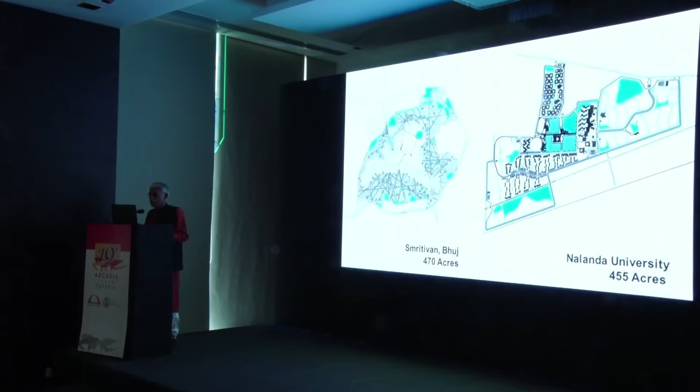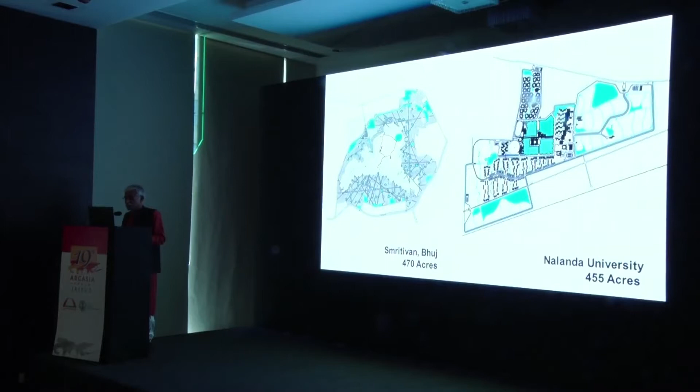I'm going to show you very briefly 2 projects that are intrinsically connected to these attitudes. One is a memorial for the earthquake victims in Bhuj in 2001, which is called Smritivan. And the other one is the Nalanda University, which is in Rajgir, Bihar. And both these projects are about equal size. One started in 2004 and is still continuing 14 years later on, and the other one started 4 years ago and also continues. So all these are things in progress.

The Smritivan earthquake project started from a very simple brief: plant a tree for each victim. There were 13,805 people who perished in the earthquake, and for each of them, we had to plant a tree. The challenge was not planting a tree. Planting a tree in most cultures is a very simple thing. In most climates, extremely simple.

In the place that I'm talking about, which is almost desert, where you get only 300 mm of rainfall, and that too once in 2 years, perhaps if you're lucky, planting a tree to sustain it is a difficult proposition. Most trees, even if you plant them, don't sustain. So the challenge was not only about planting a tree, but the sustenance of the tree, and then to make a forest, to have diversity, to represent the vastness and diversity of this country.

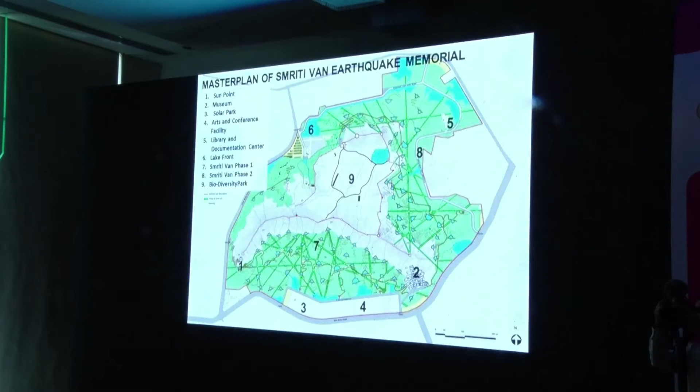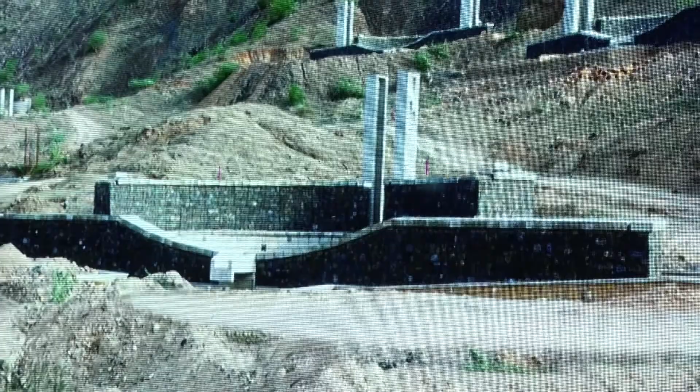The system is quite simple. There are these reservoirs made of gabions. Gabions, as you know, are rock-filled baskets. And so it is just to arrest the water that flows from the hillside before it dissipates and evaporates, to charge it into the earth. And so the waters fill up, and over time they recharge the ground. And the root systems of the trees pick up that water and grow from that. And over time, as you will imagine, soils will come in, change this.

The names of the victims incidentally happen along the walls of these reservoirs. And the reservoirs are designed so that they disconnect you from the terrestrial realm when you're entering them. And as you step in, much like a step tank, your connection is only to the cosmic forces, to the sky and to the water below, and to your inner self, to reflect in this environment.

You can see all the reservoirs that have been completed, the paths that have been connected, the planting goes on. This monsoon, most of the planting would be complete. And in another 2 years, you would start seeing the landscape emerging out of this.

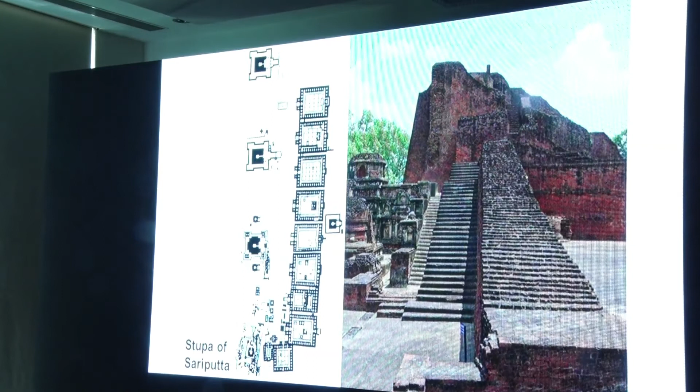The other project that I'm going to be talking about is the Nalanda University. And this is in Rajgir, Bihar. It's about 12 kilometers from the ancient ruins of the old Nalanda University. The Nalanda University, as some of you may be aware of, as Mr. Reval mentioned, is one of the oldest universities in the world.

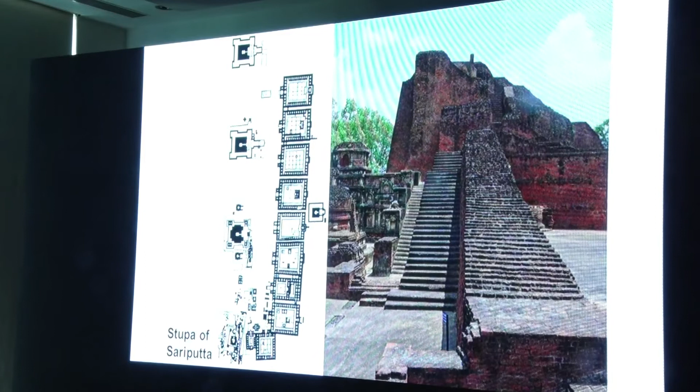It was founded in the 4th century AD and was destroyed by the 12th century AD. In that time, it had scholars from all of Southeast Asia. It built up a network of world linkages for its scholarship. And there are the parts that have been excavated. The most evocative of these are the ruins of these stupas built in brick out there, and the viharas that abut that.

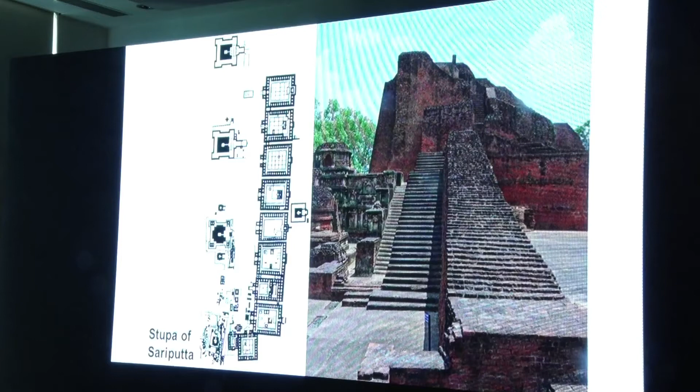Our idea was to connect the waters, because this is one of the largest net zero universities being attempted in the world. It's not a building, it's many, many buildings over many, many years that are being planned, and all are net zero, which means our water needs, our electrical power needs, our waste, all of that has to be recycled or generated within our site.

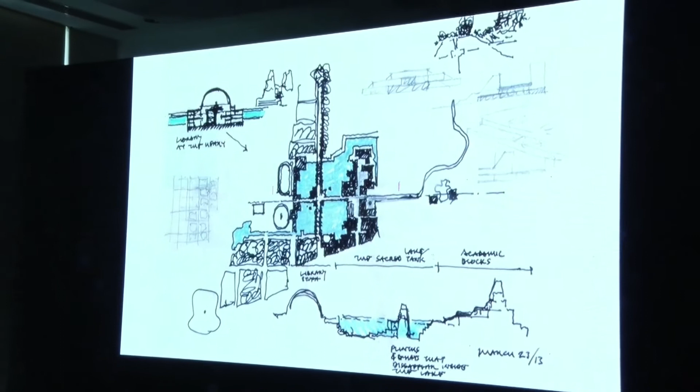So this is the initial sketch before we won this competition. It was an international competition where, out of 80 participants, finally 8 were shortlisted to participate, out of which 5 were international. And the idea of the drawing is to show a city much like our traditional cities, around a tank of water, a sacred tank around which the city grows.

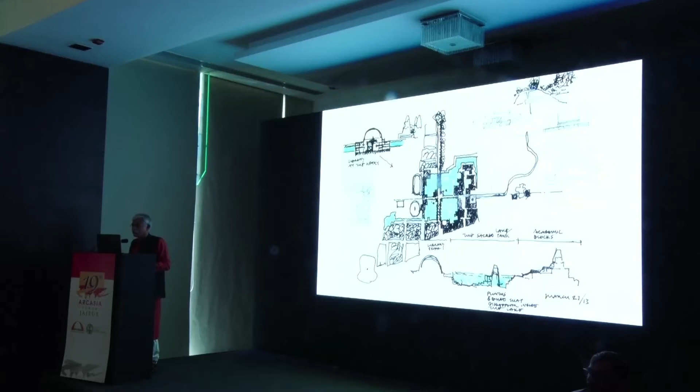Water, as most people think, is a simple thing. It's actually a fairly complex thing. The ways that you collect water become very, very important. It's not only the runoff generated, but how much soil is percolated, how much evaporation takes place. And even in the runoff generated from the rooftops, you get cleaner water. From the paved areas, you get less clean water. And the landscape runoffs, there is very little that you can collect. So all of these we took into account to balance out our water needs.

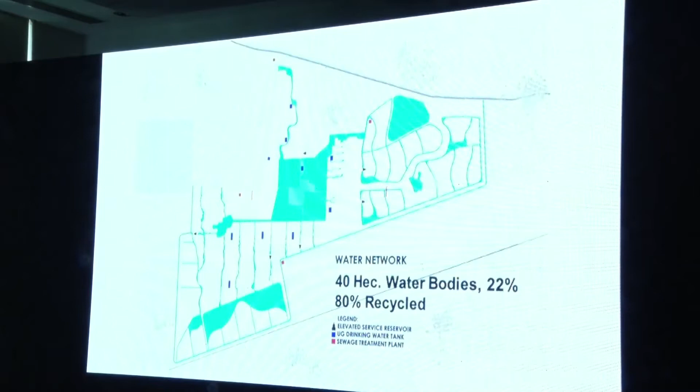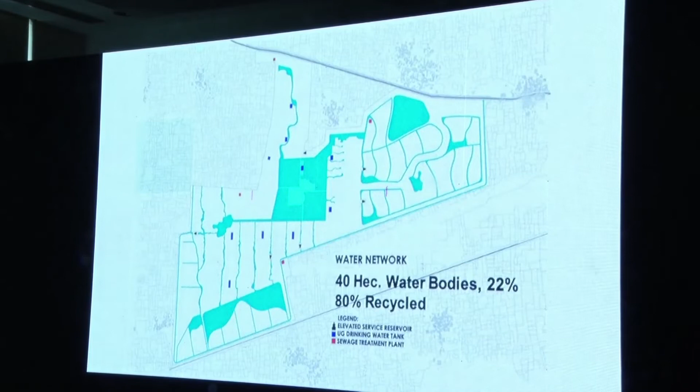And so the site of 455 acres or 184 hectares has almost 22% of it covered by wetlands and water bodies. The central tank, the holding ponds, and then several wetlands that cut through it and join it, almost like capillaries or veins that join this together. All our sewage is recycled. This network becomes the basis of how we locate things. Along that, obviously, there are pedestrian paths, etc. It's a pedestrian-friendly university. Cars are parked on the periphery. You take battery-operated buses, you walk, or you cycle.

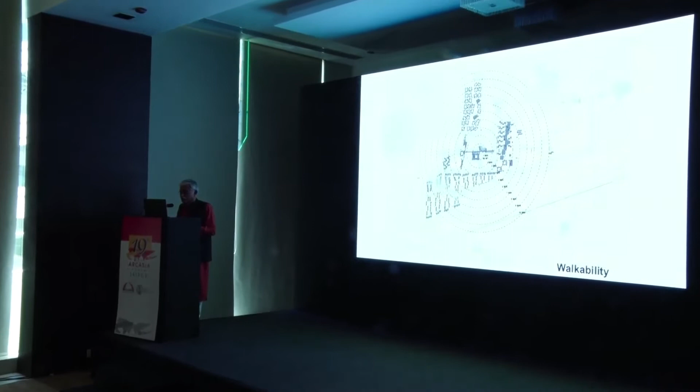The whole thing on 455 acres is within a circle of 10 minutes from its center to the periphery, so that it's comfortable to walk. 10 minutes from the furthest point to the center, and that sort of builds a compact city. One of the issues that we've been addressing is how do you change the nature of our cities? And so all these experiments in the ways that we are looking at our campuses are also sort of a precursor to how we could implement it, upscale it to the scale of the city.

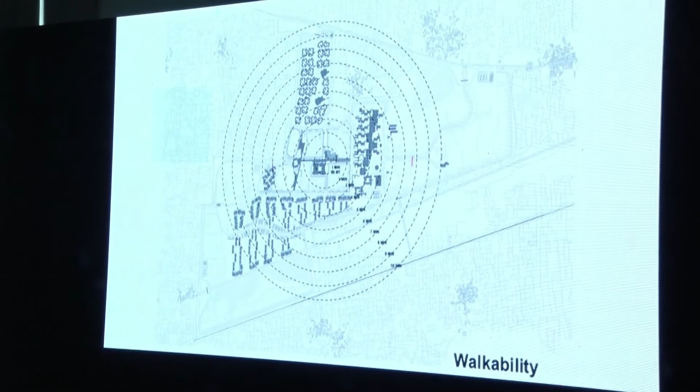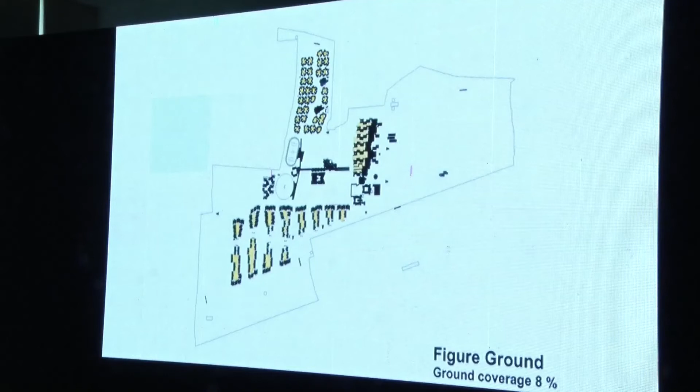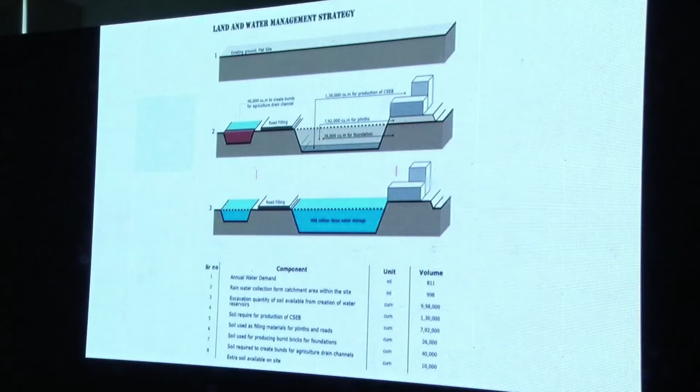One of the most important parts about this is that for all our water bodies, the earth that comes out is being used to manufacture the block that we are using to build this. And so the balance between where we take out the earth and use it with water is part of the construction system as such. The other part is that the whole way that it is designed is to cut down on energy loads. So conditioned space is layered in between several layers of buildings. The periphery buildings are all service buildings, within which you get the main usable areas, which are cooled down.

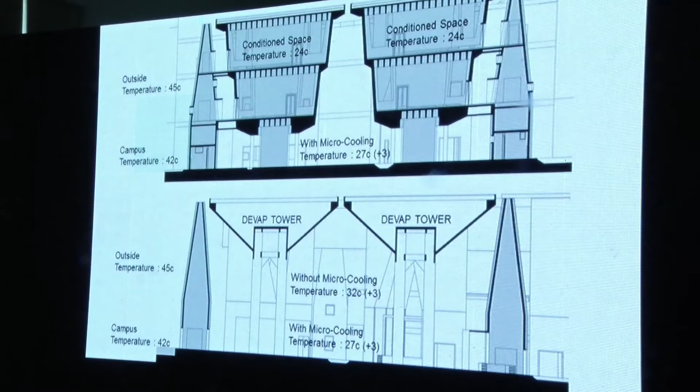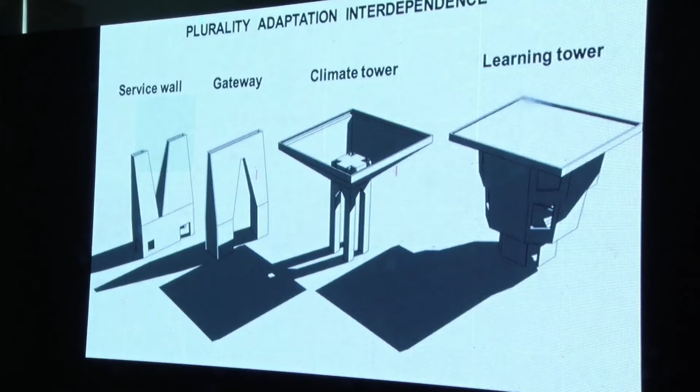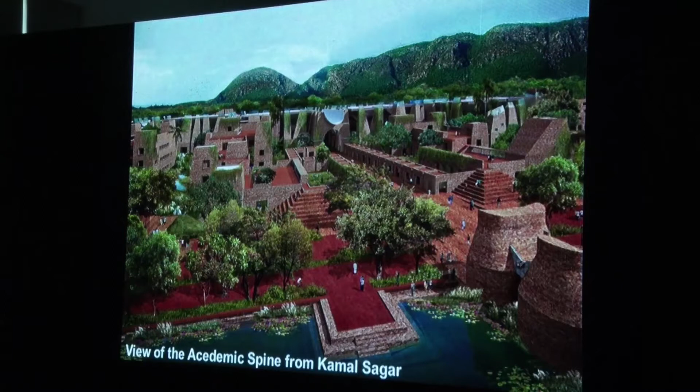And they are also symbolically linked to the fact that the negative space formed within them is a gestalt shift to a stupa. It's composed of service walls, gateways, climate towers, and learning towers, and these four elements, essentially in their variations, put together, make the kind of spaces that we are talking about, of controlling the light, of cooling the place, and yet giving a space that is inside and outside, you would not know the difference. And this is a view of the total academic spine from the lake that we are forming in the center.

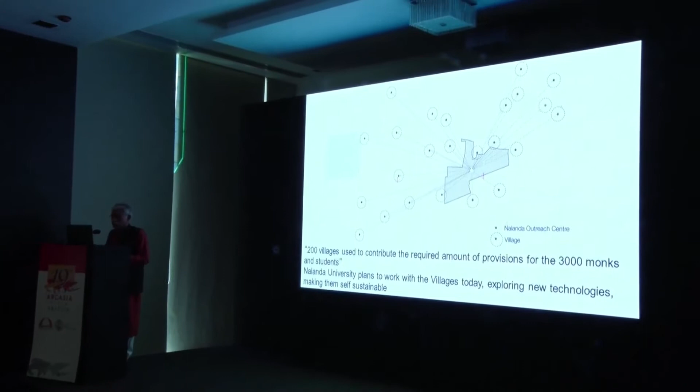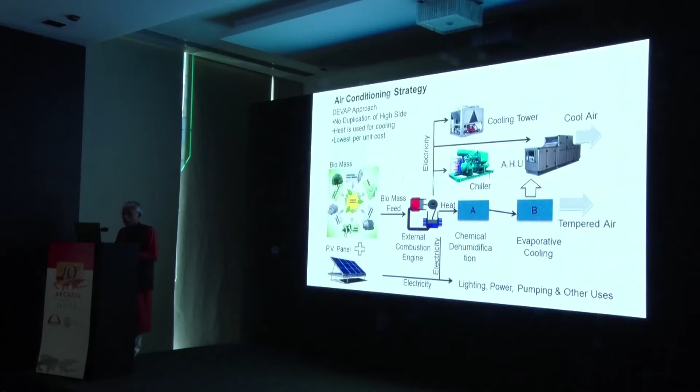An important part of this is the fact that we have an outreach center, and outreach centers that are distributed not only in the 5 villages abutting us but in several other villages, where we are working out a network of our energy needs by using the waste that they generate and recycling that on our campus. So whether it's biomass, human waste or animal waste, we have done studies.

I'll take another minute.

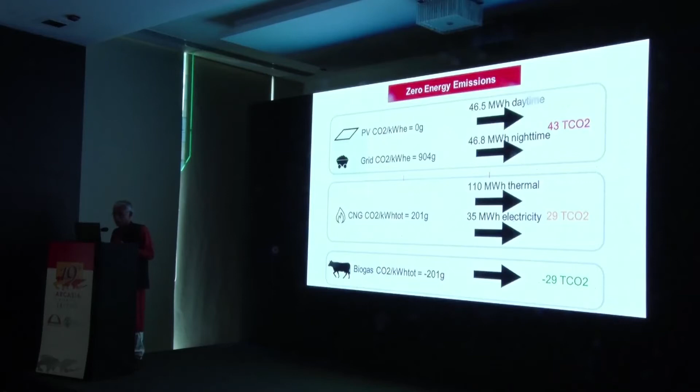Whether we have people, buffaloes, goats, chickens, pigs, all of them within a radius of 4 kilometers can supply all of us. And we look at this, that in terms of energy emissions, the carbon footprint that we have, this becomes the most effective. Instead of talking about high tech, we are saying cow tech, and we have a quarter of the world's population of cows in our country.

Thank you. Thank you, Rajiv, for your wonderful presentation where you tried to connect nature with man-made architecture. We tried to compare the ecosystem with that of the man-made architecture and the learnings from the religious rituals. I guess we will have some discussions on your paper and the following two papers after the presentations are done. So now I would welcome architect Madhura Prematilake from Sri Lanka.

Madhura, principal of TA, that's Team Architrave, Colombo, is a Sri Lankan architect and urban designer. Madhura studied architecture at Moratuwa and Helsinki and has worked in Sri Lanka, Finland, India, China, Oman, and the Maldives. He has lectured and taught extensively at international conferences and universities. TA have won about 15 design awards, and their work has been published internationally, including in the Phaidon Atlas of Contemporary Architecture, Beyond Bawa, Architectural Review, Architectural Design, A+U, and Asian Design Destinations.

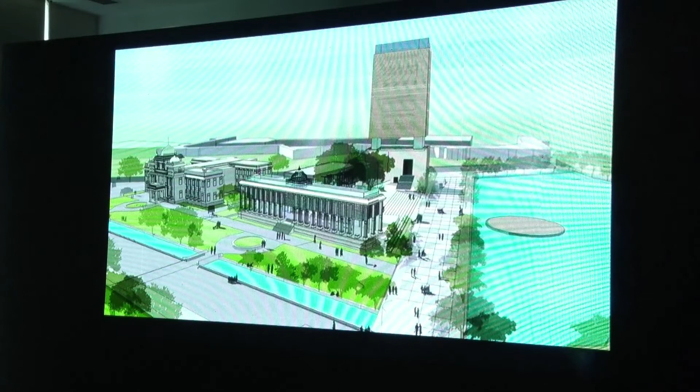What you see on the left is the public library, and what you see on the right is the cultural center. And because the cultural center is so large in comparison to the public library, it was destined to overshadow the public library, which, although it is quite revered and respected, was now going to be overpowered by this.

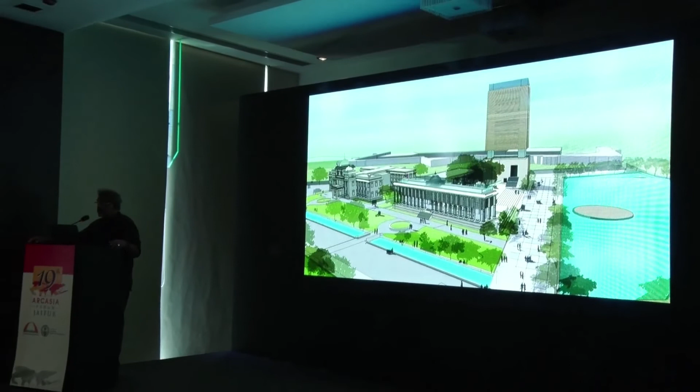So what we did was we gave up our frontage, our formal frontage, to create a colonnade in front of our building, which is picking up all the elements from the older building and, in fact, extending its presence. So you see the library on the left and our building on the right, which picks up this colonnade, and our building is then placed behind it.

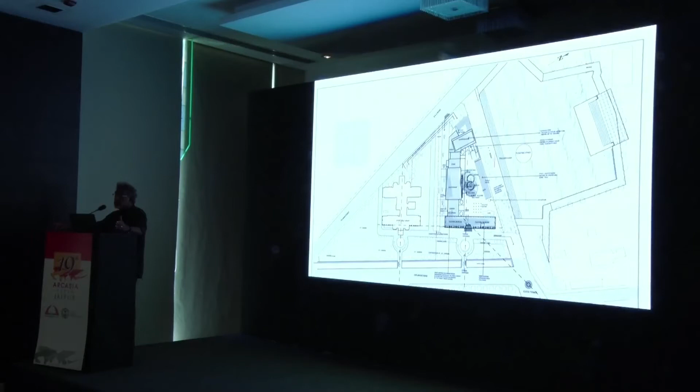And the buildings wrap around a public space, so there's an auditorium and a learning tower on the other side, and the public space then opens up to a street and to a lake. So this is the colonnade which picks up and extends the presence of the library.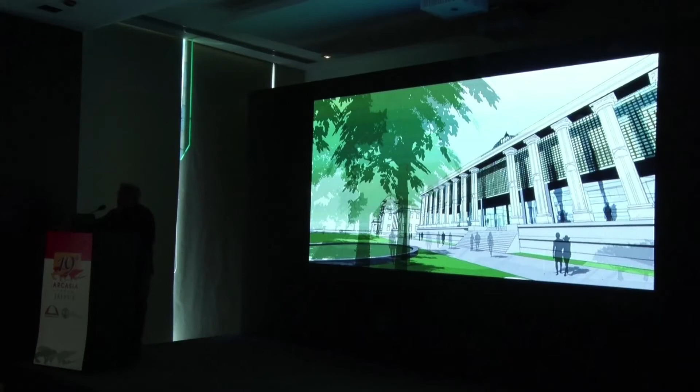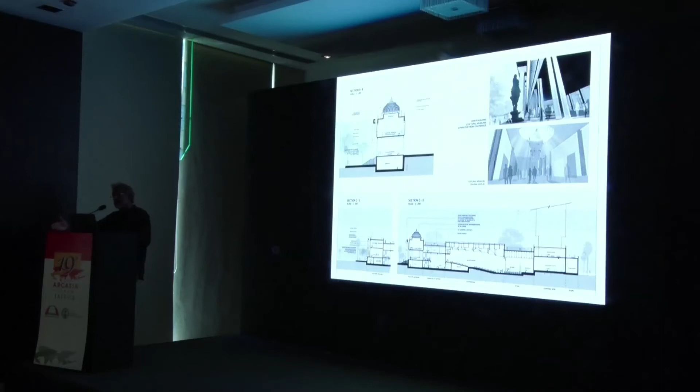And behind that, you see in the section here, the separation of that colonnade from the building which is behind it. The new building which is behind it is steel and timber and glass, but the colonnade is a repetition of the old one.

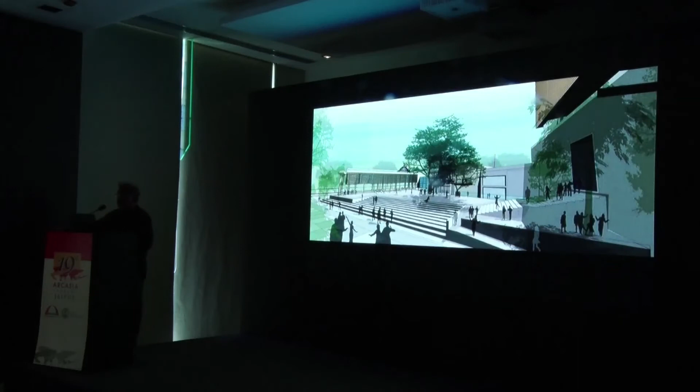So behind this, facing the public square, is a completely new center of public life, and it's a very political statement. The idea is to create an indefensible public space, because this is very much part of the whole movement for reconciliation post-war. The public space then steps down as an amphitheater to a pedestrian street, which opens to the lake, on which we hope to have events on a floating stage.

This project is a village which was built for tsunami victims in the deep south of the country. The tsunami was in 2004. It was a village with which we had some relationships before the tsunami. And when the tsunami came, there were 35 families. It was a small village. All the houses were devastated. 9 people died, mostly the very young and the very old. This was like 3 or 4 days after the tsunami.

And the first act was one of helping people as human beings rather than as architects, of helping them to stabilize their lives, getting them bicycles so that they could go back to their homes from their refugee center, and then working with the village to establish a plan for the village, the design of the individual houses, and so forth.

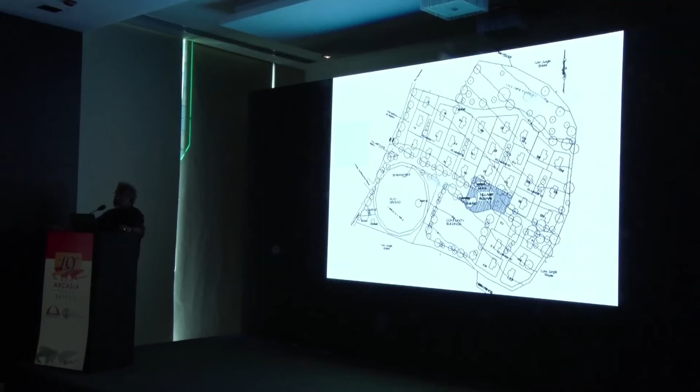There is a village forest at the back where they replanted part of the forest. There is a space in the center for community buildings, and because there was excess space, we did a cricket ground, which could then be shared with adjoining villages as well. And the buildings are extremely simple.

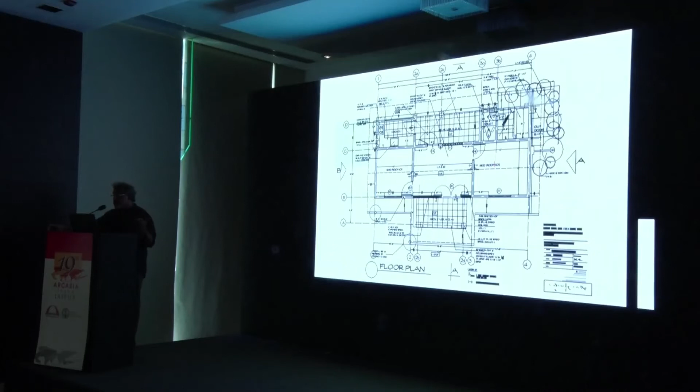We went to buildings in the neighborhood for inspiration for the type of materials we use. And really, other than keeping it extremely simple, the main idea was to have these two verandas, one in front and one at the rear, the rear one being really the more active one, where the kids could play while the mother would be in the kitchen, which is next to it, and also have all the wet areas in one zone at the back.

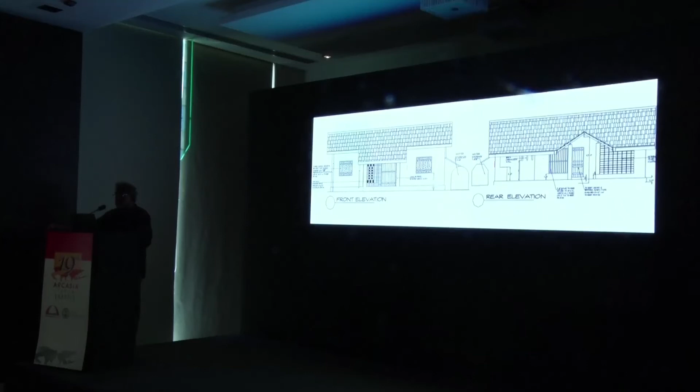Extremely simple section, built at very low cost, with rainwater collection tanks, built with a lot of voluntary participation. And then one of the most important things to happen was that most of these people who were fishermen were too traumatized by the event to go back to sea, and they became farmers, and they became organic farmers in this very dry, arid area using rainwater collection.

And they personalized these things, and we were happy to be invited to the first wedding that took place in the new village.

I'm running out of time, so I'll try to go as fast as I can.

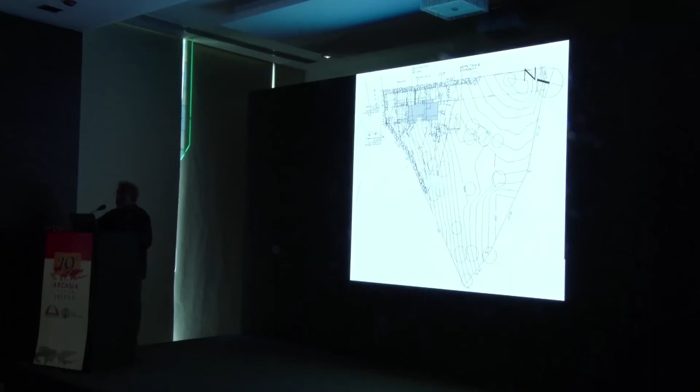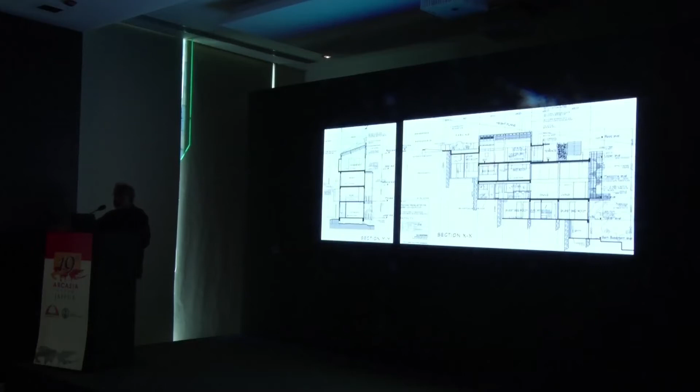This is a house called the greenhouse because it belongs to a man whose name is Mark Green. It is built on a very steep site, on a very restricted footprint, where we wanted to control the bulk of the building. So the section on the left shows how we restricted the footprint by limiting the section. And so the building is on six levels because of the steep slope, and it flows.

At the arrival level, you don't see anything except this terrace. So the building drops down and is hidden by the trees around it. It nestles really against the trees and draws its protection, shade and shelter from being built very close to these very large trees which are on the site, and a few more which we added. I'll go fairly quickly through this.

And this project is a private house, a very private house, because it's my own. I know time is up. I'll run through this. The idea here is to build the smallest possible house on the smallest legally allowed plot. So the plot is 150 square meters. The footprint of the house is 7.5 meters by 7.5 meters. And so the plot coverage is 40%.

And most of the site is occupied by trees, which is what you see here. So I won't go into the details of the plan, except to say that every space on every level is open on both sides, and it opens east and west so that we catch all the prevailing breezes, but we get all our protection from having this large amount of trees on the plot and around the plot, and creating space for the trees.

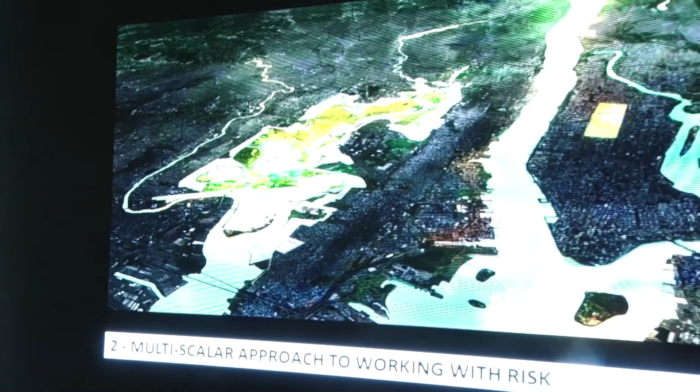So the case study that I am choosing is actually the one I'm writing a book on, New Jersey Meadowlands. And as you can see, it's right across from Manhattan, right across from Central Park, highlighted in the light. So after Superstorm Sandy happened, the American government under Barack Obama released funding for rebuilding. And this was also a colossal thing on the federal level.

The government recognized the need to organize architects. And this was the first time in the American architectural world where federal funding was coming from the government for the architects to design some new solutions. And this was a big transformation. And because of that, many commissions picked up some sites, and this is one of the sites in and around New York Harbor. And I'm just going to show you briefly how they incorporated risks.

And as you can see from the project's name, this is a project by MIT CAU, ZUS, Urbanisten Delta Works, and many people. So this understanding that architects should not work by themselves, but as part of a task force, as part of an integrated system, was the first thing that was done. And all the teams on all selected sites, this is just one of the 6 sites, worked like this. So OMA, Rem Koolhaas, has a site, but nobody knows the project by the name of OMA. It is OMA plus 6 more partners. So this shows that this kind of multi-level, multi-scalar approach was necessary and was recognized immediately.

So these projects are still in development. They're not final. So what I'm showing here is kind of advanced draft versions. But as you can see, they worked on transects, recognizing different levels of ecological systems and developing new typologies. And as for architecture, you can see that some of the edge conditions actually are directly related to architectural production. So new building typologies on stilts, some kind of breakdown of block and lot structures. These were some of the things that were brought in by this understanding.

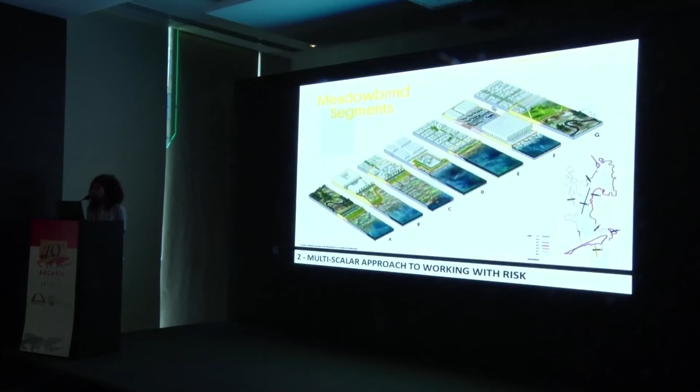And as you can see, there is this kind of terrain shift from water to land, from wetlands. And this also puts a smile on my face because there is this fascinating work by Anuradha Mathur and Dilip da Cunha from many years ago on Mumbai. The book is called Soak. And they did a similar study understanding how the terrain shifts from water to the land edge. So this is not new, but it's new to the part of the world that I live in.

And also resilience strategies, as you can see, they don't say that we will block out. We will have to adapt. That's the new understanding. We will have to have smooth edges. We will have to expect and let the water come in. And you can see that transition, especially in the cross-sectional works, and see how buildings take a position in relevance or in accordance to these different terrain structures. This is, I think, an innovation moment.

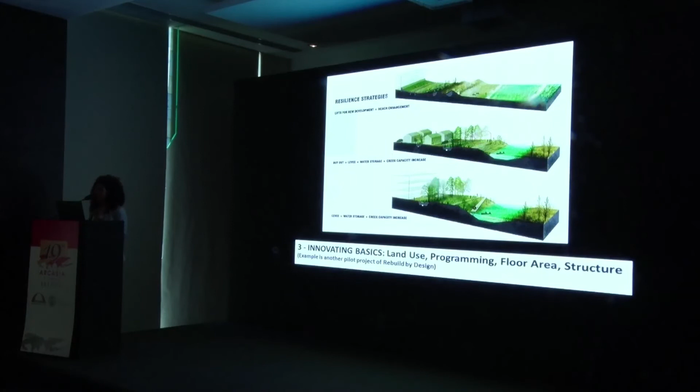Archigram talked about it in the 1960s, and everybody was fascinated by infrastructure. But it's a moment to go back to some of those earlier inspirations and say, well, maybe as architects we can take place in this and make these not just technical solutions, but also some steps to innovate architecture. And the last thing I'll show is this.

So in innovation, FEMA and the federal government and state governments required buildings to be raised. So you heard it right. Existing buildings had to be raised in situ. And there is this new real estate developer field. If you are interested in coming and working in New York, you can, I think, find a lot of clients on how to raise the buildings in place. So there are these interesting, innovative ones. Corbusier would be proud, I think, and would say, I told you so.

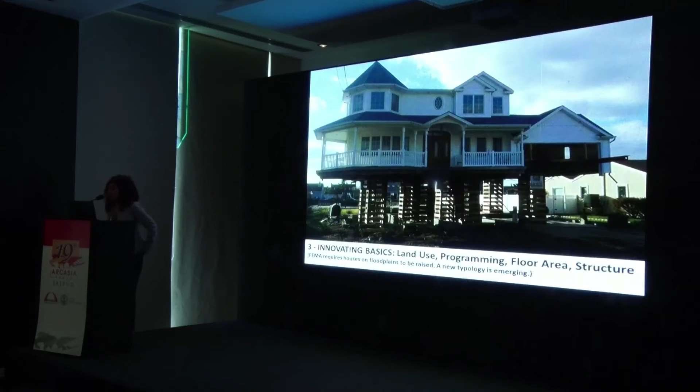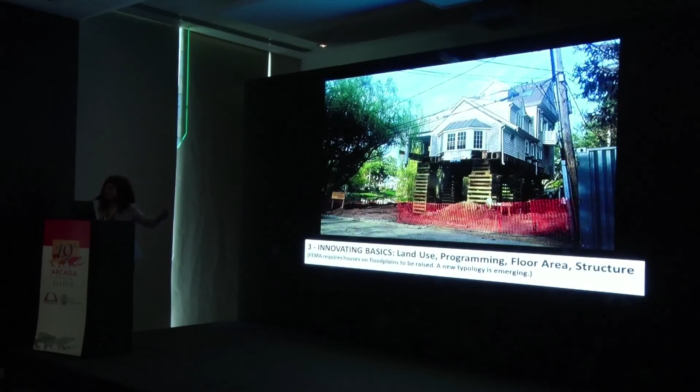But it's the idea of raising and elevating buildings, and they are done in many different fashions, and most of the time they're not even on the coastline, but in the internal areas. They are still raised. So I think this is also a moment for architects to step in and say, let's design systems in tandem with other specialists and innovate how to raise buildings in place. And as you can see, there are various forms of doing it, but most of the work is done by developers or construction people or engineers, and I think our presence is missing from this whole debate, so we can claim something on this as well.

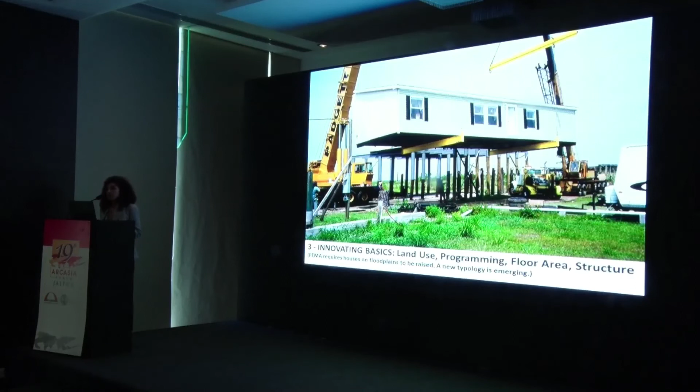And as a kind of a sum up, land use, programming, and programming meaning double uses, like the one we've seen in Bangladesh. Sometimes you use the building for one purpose, sometimes, if the conditions of the terrain don't allow, you use it for some other purpose. So this type of shift in our understanding of the brief, the program, the floor area, the structure, the basic tenets of the statics of the building would also, I think, prevent and provide a great future potential. So I hope I was on time.

Thank you, Jevin, for your precise presentation, and of course enlightening us with another issue which we can call the call of the hour, because yes, we talk about sustainability, but today we need to take sustainability towards another dimension, resilience architecture. When we talk about resilience, we have to be aware of the risks associated with these natural disasters, natural calamities, and of course these are the results of climate change. So these are all realities.

So architects should think in different dimensions, not only be limited to the design which would show the aesthetics or the planning aspects. There have to be inputs from architects in terms of having safe buildings in association with the engineers and other professionals. So, ladies and gentlemen, we are done with these three excellent presentations focusing on sustainability in the presenters' own way.